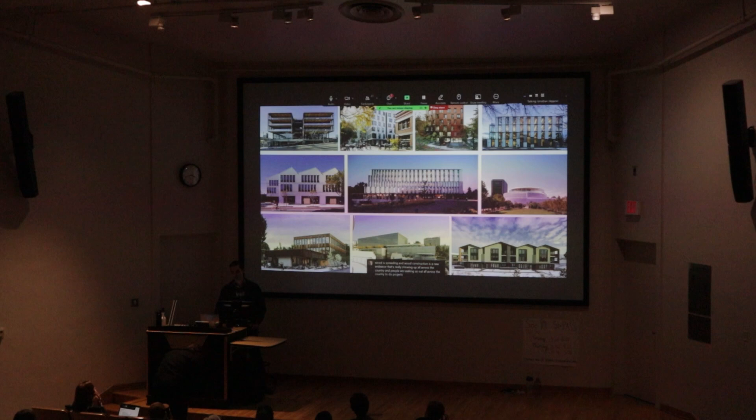Every couple months I update this map, and what's interesting for me is that as an Oregonian focused really on wood construction, all of a sudden wood is spreading and wood construction is a new endeavor that's really showing up all across the country, and people are seeking us out all across the country to do projects, specifically in mass timber.

So what I wanted to talk about a little bit, aside from just giving you a quick sample, these are some of the buildings that we've done that are complete this year, and I'll go into a few of these maybe at the end of the discussion. And these are a group that we have that are all in design right now and in permitting.

So our office probably has 30 people, and right now we're completely overwhelmed with the exciting work that we're doing. But I'm going to share a little bit of the research with you, and then share a little bit of how that research ends up folding back into our projects.

But before that, I wanted to talk a little bit about the forest, because I was joking with other people earlier that I was raised by trees, and the more I would say that, it was kind of a tongue-in-cheek thing, like, ha ha ha. And then the more I started thinking about it in little quiet moments on an airplane or in a car

or whatever, I was like, actually, really, everything that I'm involved with somehow ties back to this initial memory or experience or something about the forest, and it made me realize how intricately interwoven all of our experiences are with products that are made from wood and just the forest itself.

So I grew up really interested in drawing and sketching, and was fascinated by this book, D.C. Beard, where, I think this is potentially the founder of the Boy Scouts. There were all these little sketches and different diagrams about how you could put together buildings.

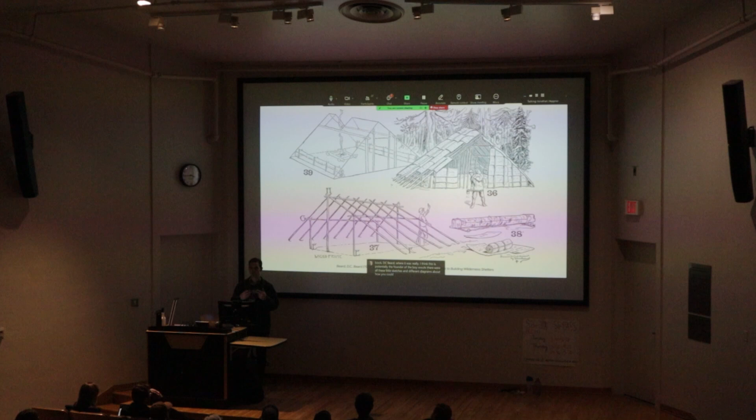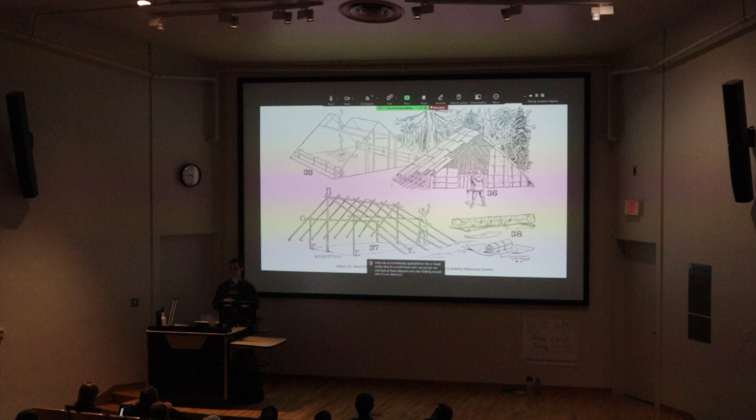And for me, what was so immediately applicable for this is I lived pretty close to a small forest, and I could just go out and look at these diagrams and start fiddling around with it in an afternoon, steal my dad's saw or whatever, and end up being able to build little structures, and it created this interest in the forest.

As I got older, I found that I could go to this really interesting camp in the Siuslaw National Forest outside of the Oregon coast. And I wasn't around when this building was built, but what was unique about it is that the U.S. Forest Service provided a land lease so that campers in this camp could grow up. And so every summer I would go out to the forest and spend time in the woods, just hanging out.

And I think this, to me, brings something full circle, which is this idea about community and the idea of being out in a place with people or just in a room with people, and the ability to share ideas and how that will then translate back into our work. So that theme will probably come back around as I'm talking about our projects.

So before we talk about mass timber, I wanted to talk a little bit about the way that timber was used historically, I guess, in the early 1900s for construction. I find it fascinating that somebody walked into the woods at some point and there was a tree that was this scale, and they imagined cutting it down.

There was this immense abundance of resources in the West, and that abundance led to a lot of really beautiful buildings and this advancement of hand technology and construction technology that I guess you probably wouldn't call technology in the 1900s, but this idea that you could build structures that would last out of this material that was just right outside your door.

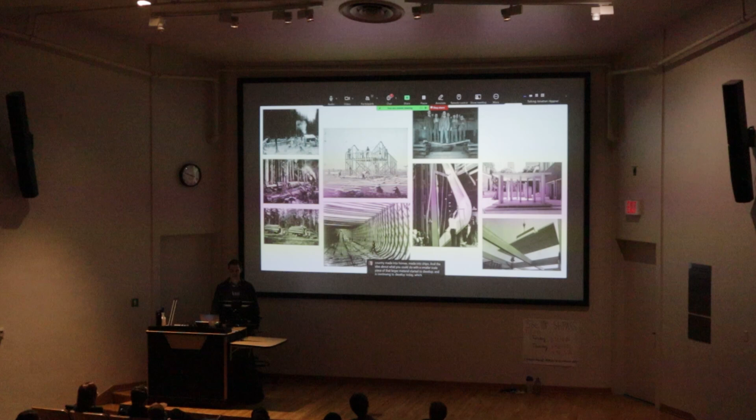So as technology and this availability of lumber was more readily known, there was a lot of transportation. The railroad systems were completed to connect to the west, and immediately you started seeing that it was cost prohibitive to haul really large things, and so you'd start to see smaller and smaller increments of that large thing shipped around the country, made into homes, made into ships, and the idea about what you could do with a smaller scale piece of that larger material started to develop, and is continuing to develop today, which is now the primary focus of what I spend the vast majority of my time working on.

I think the other thing is that, speaking of the abundance, this is an image from the 1930s in Idaho, where logs would float down the river, and I don't know if any of us have seen this in our lifetimes at this point, unless it's maybe in Canada somewhere. But this no longer occurs, and there was so much forestry happening and so much of the material coming out of the forest, there wasn't maybe a lot of consideration about how long it would last or what the implications of its use were.

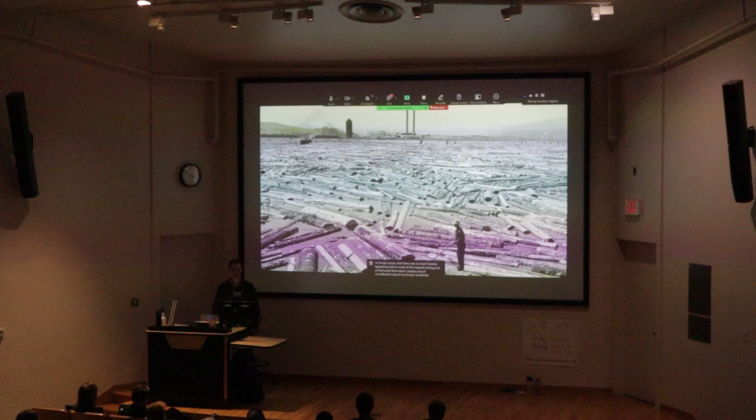And today we find ourselves in a slightly different scenario where there is an abundance of forest still, but there's also a lot of environmental issues that come from extraction of the wood from the forest that cause me to think about my use of that material. There's also a lot of construction emissions, not from wood specifically, but just from concrete. And I've been startled to always look annually at how much global concrete has been used this year, and what the use of that material implies for our world. Also, with forest fires, the amount of carbon that just a fire of a single forest can release.

I think what's interesting about this discussion around wood is that as an architect and a research architect, I find it really fascinating. Is there some way that I can use or think about the material that has a positive impact that will help people either have an elevated experience or just that there's some meaningful value in the work that I'm doing that improves people's lives?

So I don't know if this is widely known. I feel like I see this a lot, but our buildings and the construction industry produce over 30, up to 40% of the emissions annually. And so the work that we're doing in construction has a direct impact on air quality, water quality, animal habitat, etc. And so I continue to think, well, what does the relationship that I have with the forest mean, and what can I start to do in my practice that will have a more positive impact on that?

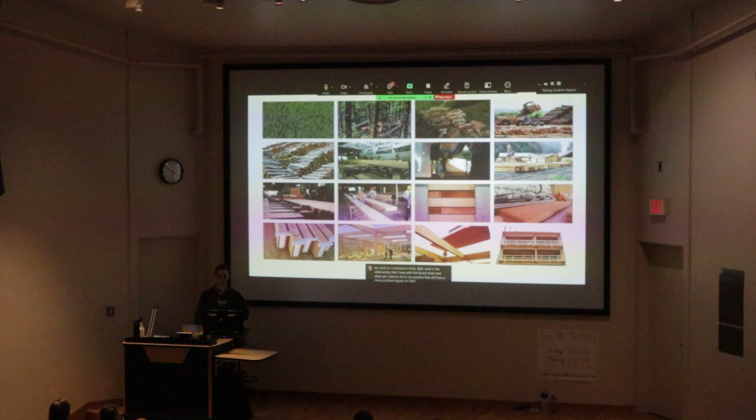So in about 2017, we started looking at this idea of forest to frame with some of our projects, and really started doing something that for me was unique in my practice, which was looking upstream of where I was designing to start making relationships and learning more about who was cutting down the trees, who was actually fabricating the trees, what were their concerns, what were their interests, and at each step of that process, I started to realize that I was a part of a much larger chain, and that my typical purview as an architect was really that I would talk to somebody who had already produced a material, work with somebody that wanted to build something with that material, and conceive of a design with a team of people to take that product and build something.

And the discussions that we were having made us realize that we needed to expand that discussion and interaction with the people that were actually milling the material, cutting down the logs, growing the trees in the forest, so that we could understand a little bit more about the material that we were working with. So that led us into our work with mass timber, and I won't go deeply into this because I'm sure that most of you know and understand what mass timber is, but at a molecular level or a cellular level, wood is an incredibly unique technology, I'll call it.

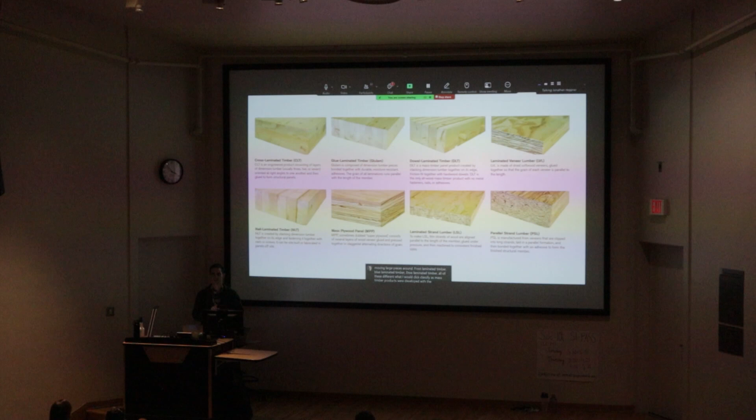It has amazing compressive force, and it sucks up water, and it also sucks up nutrients, and it captures carbon, and it has all these amazing things that it's doing. And because of its scarcity, I guess you could say, or the cost of moving large pieces around, cross-laminated timber, glue-laminated timber, dowel-laminated timber, all of these different, what I would classify as mass timber products, were developed with the use of adhesive to start putting together smaller pieces of wood into structural materials.

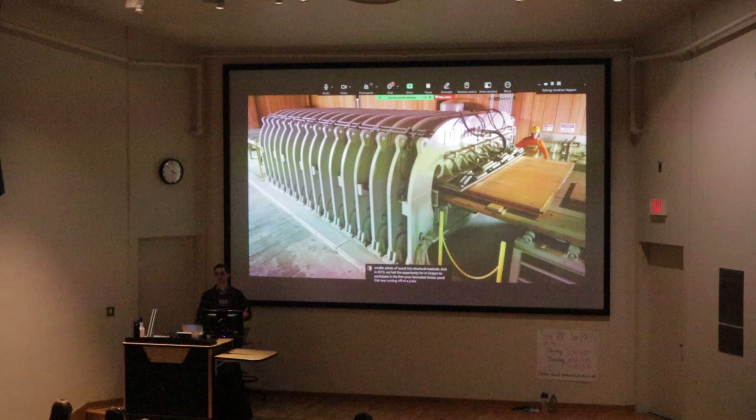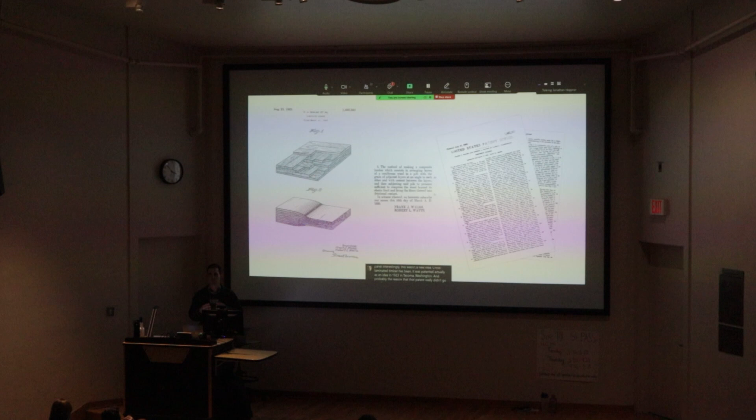And in 2015, we had the opportunity in Oregon to participate in the first cross-laminated timber panel that was coming off of a press and conceive of a building that used this panel. Interestingly, this wasn't a new idea. Cross-laminated timber was patented actually as an idea in 1923 in Tacoma, Washington. And probably the reason that patent really didn't go very far in 1923 is because there were plenty of really large trees that people could build with.

So moving to the current day, the benefits that we can see is that it has an incredible strength to weight ratio, it's fire resistant, it's fast to construct with, it's clean comparatively to doing lots of dirty concrete work. The construction is fast and quiet, and it also has all of this ability to sequester carbon, and depending on how you think about where it's coming from, positively impact issues around wildfire, etc.

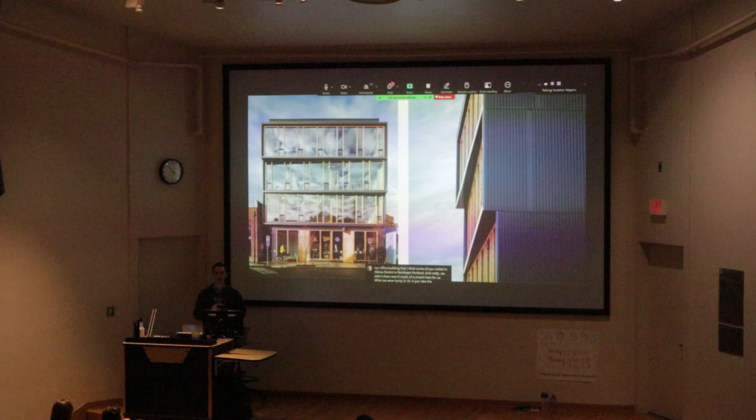So in 2014, we started the design on what's now our office building that I think some of you visited in Albina district in Northeast Portland. And really, there wasn't much of a stretch here for us. What we were trying to do is just take the material and knowing that other people were going to be building with it, like just don't mess it up. Just do a good building and keep it straightforward.

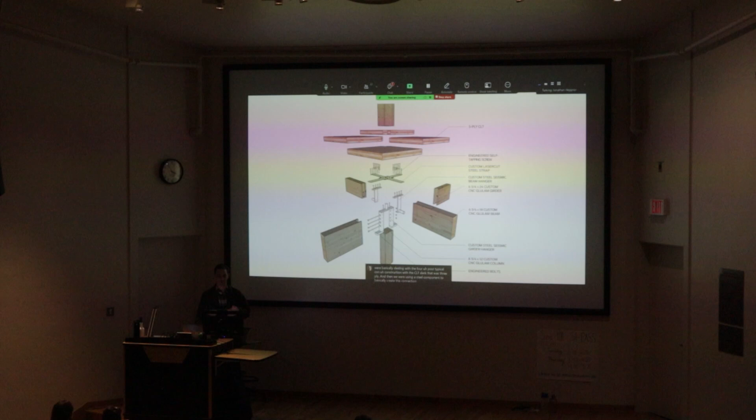And so the system that we conceived of seems really extremely complicated now in retrospect looking at it, but we were basically dealing with a 4-post typical construction with a CLT deck that was 3-ply, and then we were using a steel component to basically create this connection. And most of the building details used this one detail, so we tried to just come up with a simple detail that we could repeat over and over again.

And the way that ended up shaking out after we produced the construction documents and went through the shop drawing process is that we had to work with somebody that we hadn't worked with before, which is the fabricator who is going to be actually cutting the design that we had put into the SketchUp model and the Rhino model that we were working with. And as we started to work with it, we realized all of a sudden that most of the details that we had drawn didn't really work that well.

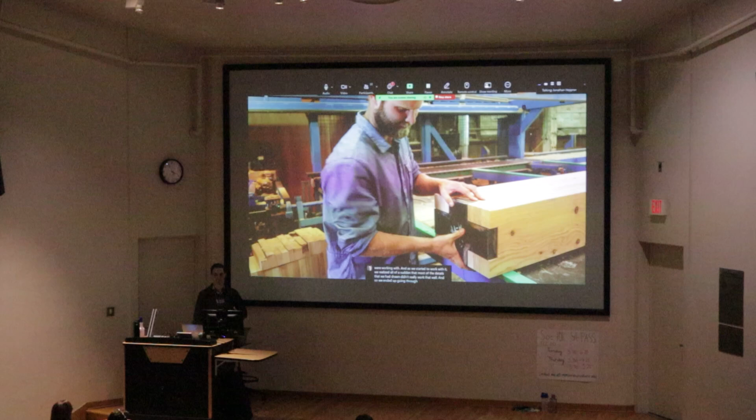And so we ended up going through this really exciting design build kind of process, I guess you could call it, where we were doing mock-ups to test the material. And in this case, we realized, for instance, that the CNC fabrication was so precise that we had to account for the welds in the steel. And there would have been no way to know that unless we had actually put the two things together and built it in place to test it.

And the building turned out really excitingly. It turned out great. Construction was very quick, so we could bring the materials up. The CLT panels would come up from outside of Eugene in about 3 hours, and they would arrive around 9 in the morning, and then by lunch, a team of like 3 or 4 people would put down 4,000 square feet of floor deck and then get the walls and the columns tilted up and prep for the next floor, which would take another week or so to build. And the level of resolution of the material was absolutely beautiful.

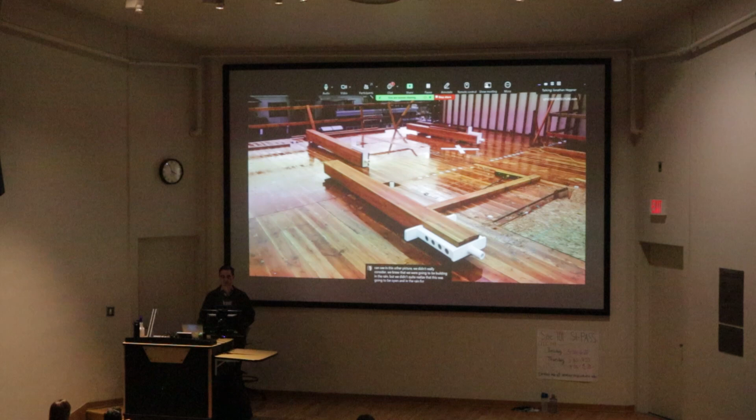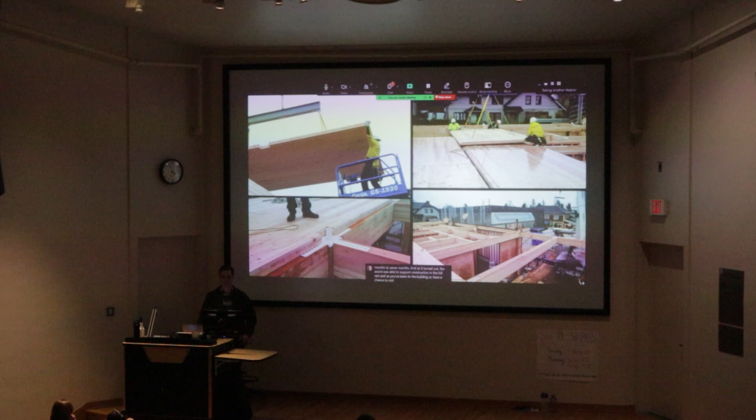And as you can see in this other picture, we knew that we were going to be building in the rain, but we didn't quite realize that this was going to be open and in the rain for probably 6 months to 7 months. And as it turned out, the wood was able to support construction in the full rain, and if you've been to the building or have a chance to visit, you could never tell that it was exposed to that during that time.

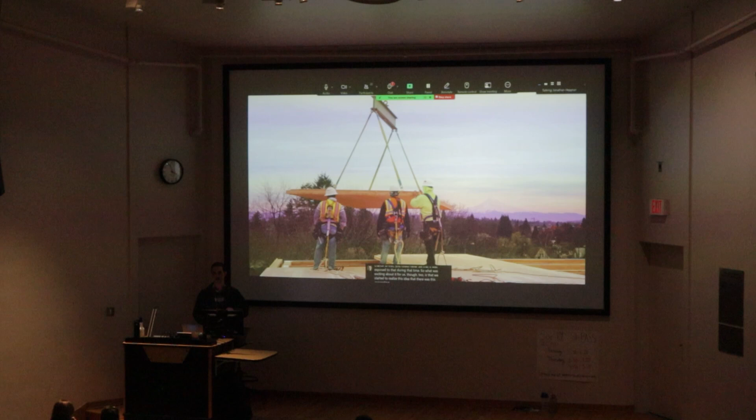So what was exciting about it for us, though, too, is that we started to realize this idea that there was this connection, and especially when you went up on the top floor on the job site, that you realized, like, oh, the building that I'm standing on right now is produced from the forest that I can see in the distance. And there was a direct one-to-one correlation that was very present and impactful.

So around the same time, there was a competition for a tall wood building that was mentioned in 2017. And there was a lot of emphasis on the use of mass timber. It was a national competition. We won the competition with SHoP Architects also winning a version of it in New York. In Portland, Lever was going to design a 12-story building that was for affordable housing and a B Corps office. And then in New York, they were going to design luxury condos, high-rise,

which gives you an indication of the difference; I found that interesting. But for the competition, we developed this idea that for this material to be successful, we would need to be thinking about the forests that the materials came from and how that went to the mill, and this idea of what we call the virtuous cycle, where rural economies and urban economies were joined, and that we were doing a lot of things all at once just through the use of this one material.

And interestingly now, as I look, and this was now about 7 years ago, when I start to look at the work that we're doing, all of these little jobs, forestry jobs, the manufacturing jobs, new projects, code acceptance, transfer of technology, we were just making this up at the time, and what's exciting for me is that all of the things that we were talking about in this diagram and hopefully seeing the opportunities for have started to take shape, and now in 2024 are happening.

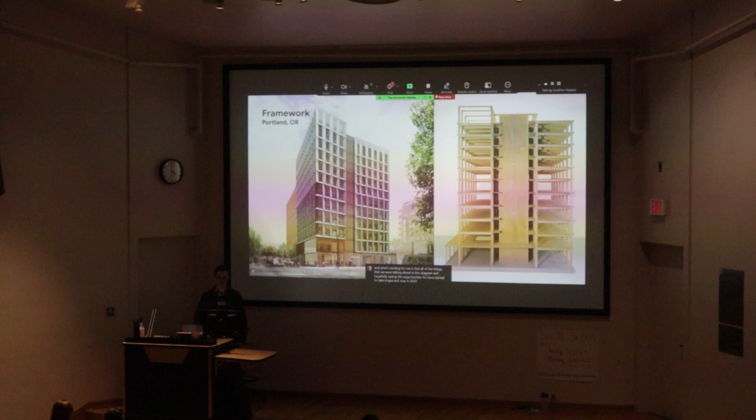The unique thing about this building, Portland is in a high seismic area, and so we had to go through a lot of testing, and the grants that we got for the project were really about the testing of the material. The jurisdictions that were approving it, which in this case was the state of Oregon, didn't know that it was fire resistant. There was no method or model necessarily, so we had to show through testing that the building was fire resistant. Structurally, we were in a high seismic zone, and there was not really an idea whether the building structurally at that scale would work, so we had to do structural testing.

And then there were no current standards for mass timber and floor assemblies and acoustics, so a part of the building code is that we had to do acoustic testing so that we could indicate that when your neighbor's upstairs going nuts, the code level floor would make sure that you were comfortable in the unit below.

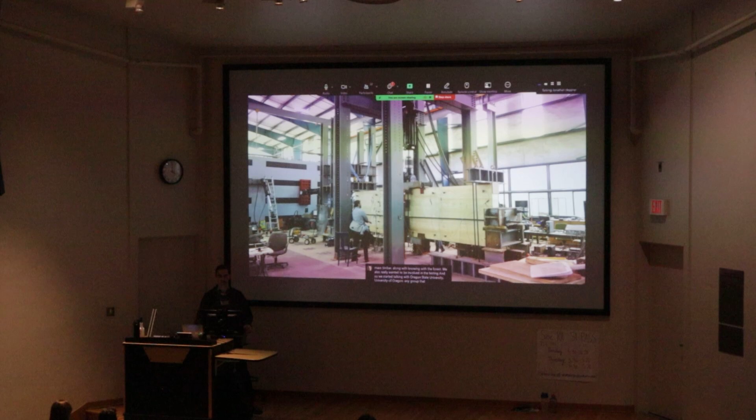And I think this was really the point in the firm where there was a small fork, and we realized that if we were going to be serious about building with mass timber, along with knowing the forest, we also really wanted to be involved in the testing. And so we started talking with Oregon State University, University of Oregon, any group that was doing mass timber testing, and would work with them along with our practice in architecture to start trying to get things approved and get money from grants so that we could spend some of our work testing products to use in buildings.

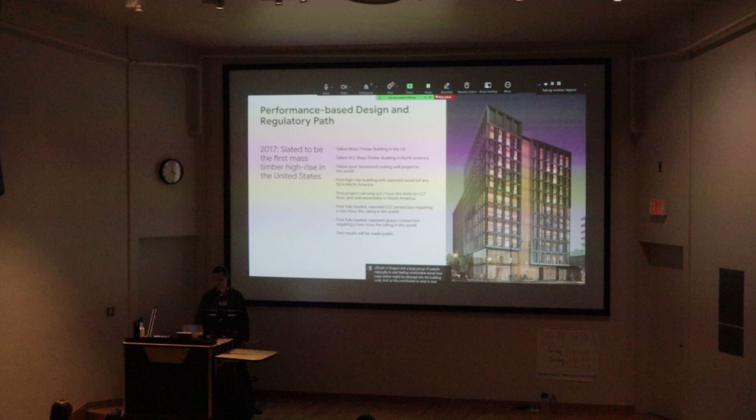In the meantime, the Framework project was able to get through permit, as the first permitted mass timber high-rise, and that permit allowed the building code officials in Oregon and a large group of people nationally to start feeling comfortable about how mass timber might be adopted into the building code. And so this contributed to what is now codified in Oregon and other states around the country.

So we started out, we always have the fir tree up for reference. We started out with the small, what we'll call a type 5, which is an all-wood small building, and then we did Framework, and Framework didn't get built. And then what was interesting is that in Milwaukee, Wisconsin, there was an interest, a piece of land, and a company was able to put together a team.

Some of the builders were from Portland, and they had knowledge of the Framework project, and we talked with them, and some of the engineers, Thornton Tomasetti, were working on the project, and we started talking and sharing some information, and they used a little bit of the research that we had done to talk with the building officials in Milwaukee, and the Ascent Tower was completed, I think, 2 or 3 years ago now, at much higher than we had anticipated for Framework, at 25 stories.

And I think they're now working on a building that's mass timber that's maybe 29 to 30. And Wisconsin's apparently really cool with timber, so. And then also, at the same time, we started working on a project called Sandy Pine here, well, I say here in Portland. I'm not in Portland, I'm in Idaho, but in the US.

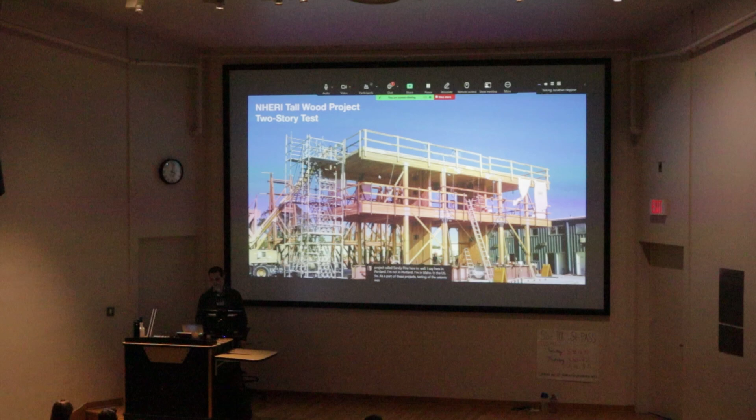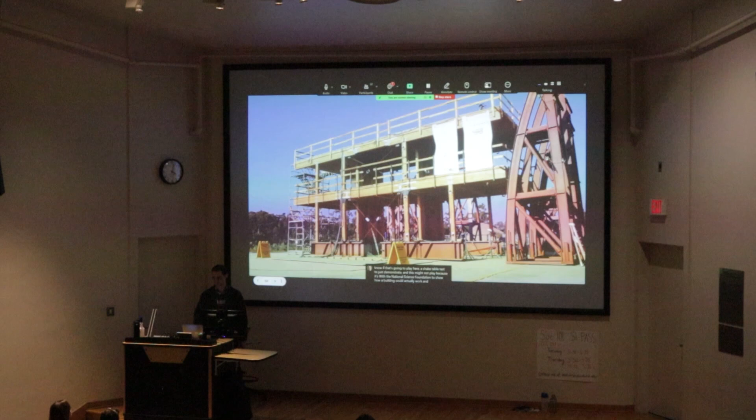So, as a part of these projects, testing of the seismic was a really important piece. And so we, in partnership with OSU, started working on a shake table test so the building could actually experience seismic forces and not have damage. This particular test led to the utilization and interest by the National Science Foundation for a much larger version of the same thing, because they thought, well, it's great that it works at 2 stories, but will it actually work at a much higher?

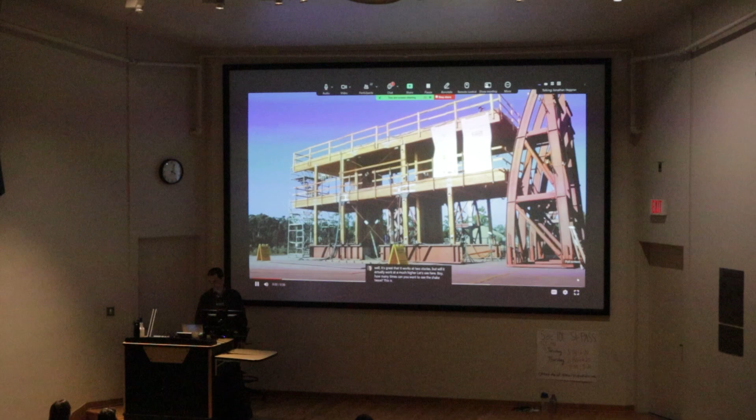Boy, how many times can you want to see the shake table video? This is the danger of including videos into your presentations. I'm going to have to click out of here. Well, just go to the next slide. Video keeps on playing. Oh boy, kick you out all the way. Nice to know. So in 2017, along with Framework, we started working on, oh boy. This is why I was debating, should I do a video? No, maybe. Yeah. Just pick a spot here. I'll go back over to my backup deck, the non-video deck.

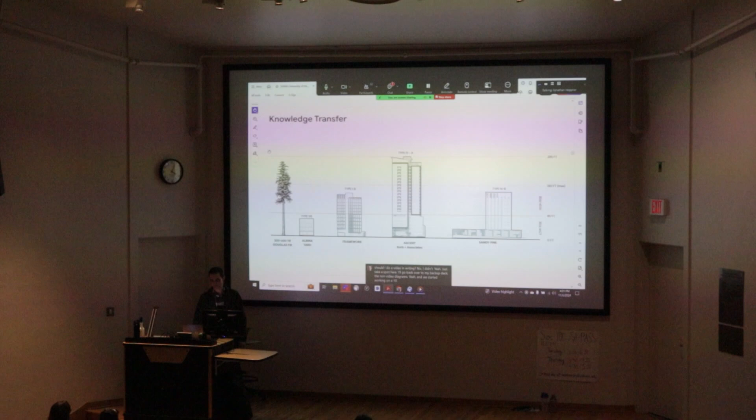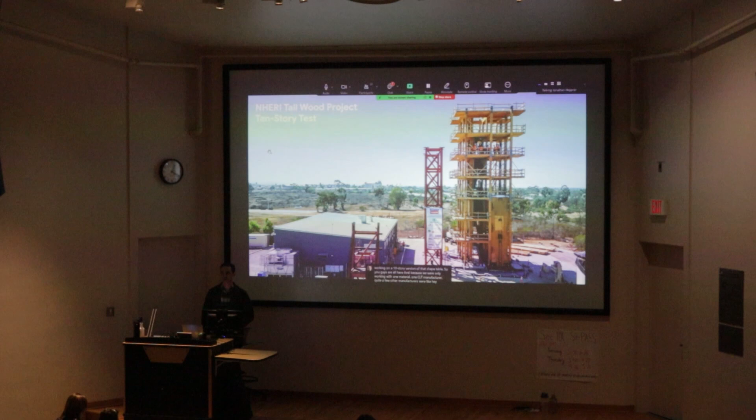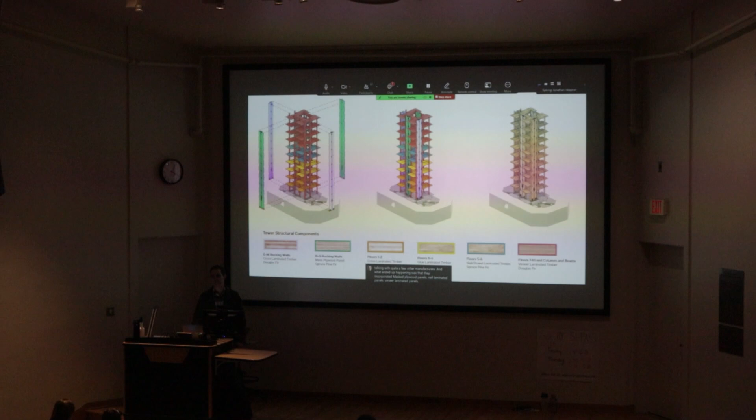Yeah, and we started working on a 10-story version of that shake table. And because we were only working with one material, one CLT manufacturer, quite a few other manufacturers were like, hey, if you're only going to get it tested for this one material, then that's the only product that's going to be used in our buildings. So the principal researchers started talking with quite a few other manufacturers, and they incorporated mass plywood panels, nail laminated panels, veneer laminated panels, glue laminated. All the laminations and acronyms started to get out of control.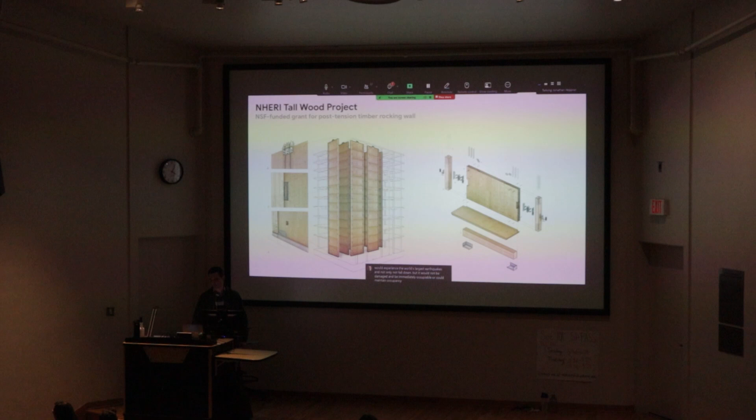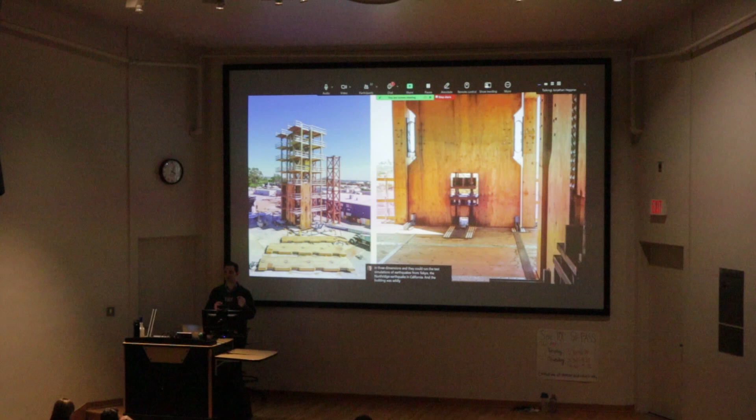But it did successfully result in a 12-story project, and the goal was to indicate that you could build a building that would experience the world's largest earthquakes and not only not fall down, but not be damaged and maintain occupancy after the earthquake. The testing table would work in 3 dimensions, and they could run simulations of earthquakes from Tokyo, the Northridge earthquake in California, and the building was wildly successful. There was one piece of damage, a slight error that we had made in the detailing of a non-structural component.

Oh, I unshared again. This is good. Good stuff. Love technology. It's our friend. Thank you for bearing with us in this wild ride of somebody sharing a screen. Wait for it. All right.

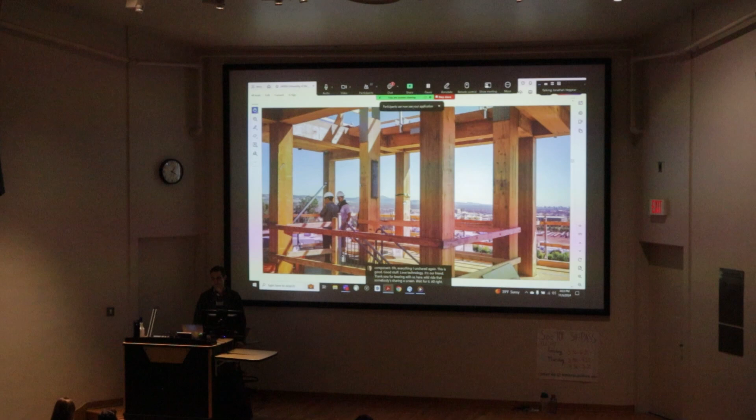So the test was wildly successful, and the error in drywall was attributed to a miscalculation, and the building successfully weathered, I think, over 1,000 simulated earthquakes with no damage. The reason it worked was because we had communicated as a group, and granted this took 7 years, so there was a lot of communication. It was people from the forest industry, lots of different universities, the US Forest Service, and quite a few different engineers. It really reminded me that it takes a lot of collaboration and community to come up with solutions and not necessarily just protect your creative IP.

So somebody during the process for the shake table reached out to us in Oregon, and they said, we're going to design some mass plywood panels. I was going to show you the video of this, but I may not do that now because I don't want to have you weather another thing. But there was a John Yeon installation happening at the Portland Art Museum, and John Yeon was a well-known architect that worked with plywood quite some time ago, I think back in the 50s, maybe even a little bit earlier.

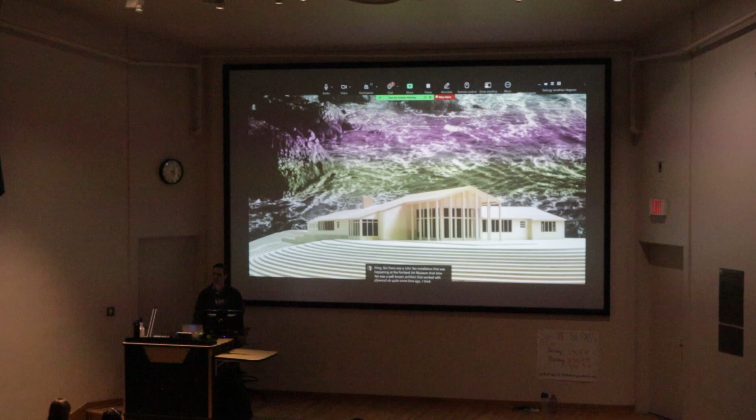And so as a part of that installation, we worked with this manufacturer to take a test of their panel, which had not been put out on the market yet, and do a little demonstration pavilion with it for the Portland Art Museum. And the interesting part of these panels is that they can be fabricated up to 10 feet or 11 feet wide and 48 feet long.

And I won't go into my own internal thought process about the differences between CLT and MPP, but there is one interesting thing. So CLT is made from stacking boards on top of each other, layer over layer. And the boards are basically cut. So if you imagine that a tree is accumulated over time, it's just layers on layers on layers. So every year the tree gets larger and larger. A beam is cutting through that, or small dimensional lumber, you're just slicing through that.

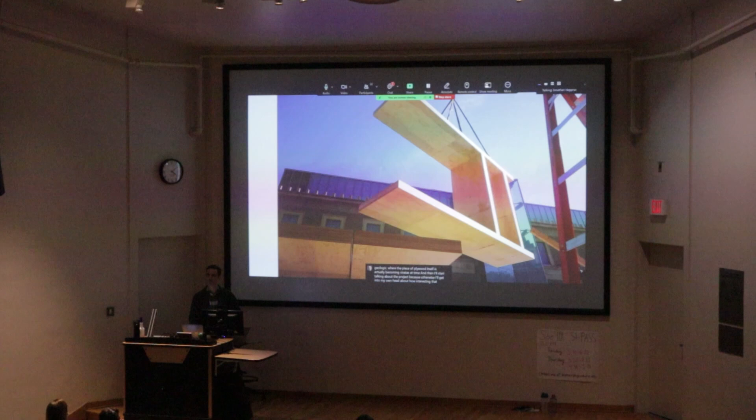And the interesting thing for me about plywood is that you're literally unraveling time when you run the log through the machine that's creating the veneers. And so what you start to see is, in a weird way, geologic, where the piece of plywood itself is actually becoming strata of time. And then I'll start talking about the project, because otherwise I'll get into my own head about how interesting that is, and where did that little piece of wood come from, and what was the weather like that year.

So anyway, we used this as a demonstration for the product, and they left it out in the rain to see what would happen. And then they were like, that's really cool, so let's see how much cutting can you do with it, and we might want to get interested in that. So we went through and did a series of pavilions for the Mass Timber Conference over 3 years, where we would work with the manufacturer to basically test out different ideas and start to create these little test buildings, we called them, that would become a center focus at the Mass Timber Conference.

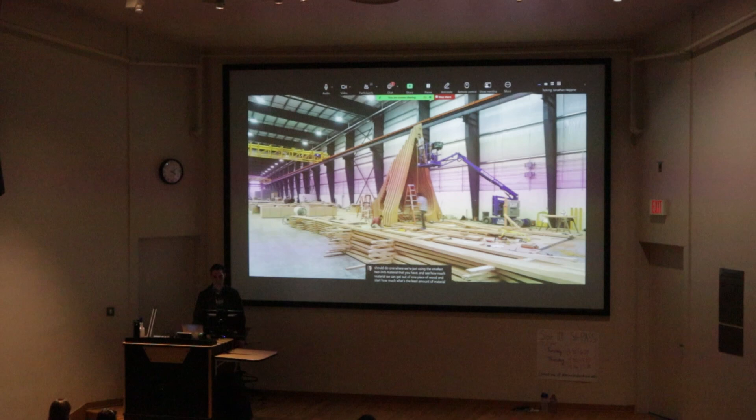And the final year, we're like, well, we should do one where we're just using the smallest 2-inch material that you have and see how much material we can get out of one piece of wood, and what's the least amount of material that we can use to create a form. And it was just this really amazing opportunity to mess around a little bit with digital technology and fabrication. And then the idea of nesting and learning how to nest things and expand them, that has been really helpful.

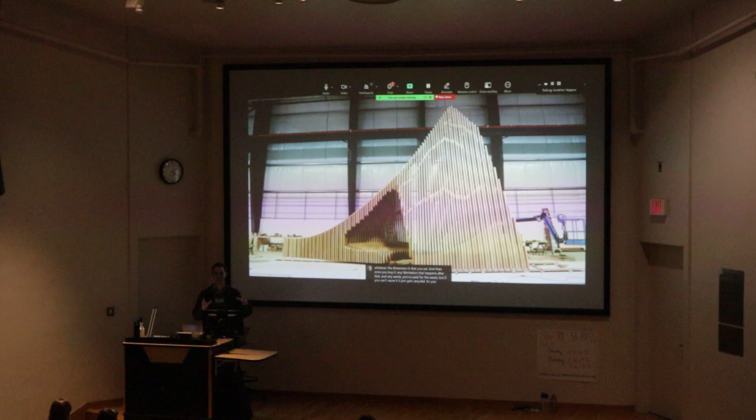Because ultimately what it comes down to is that it costs money to buy that piece of wood. And as a designer, what you have to think about is that you're buying a whole piece of wood. You have to buy the whole 10 by 48 thing, or whatever the dimension is that you set. And then once you buy it, any fabrication that happens after that, and any waste, you paid for the waste, but if you can't reuse it, it just gets recycled. So you really have to think about, how can I use the most out of that material? And it's led to this really interesting architecture of optimization and efficiency that we're constantly talking about.

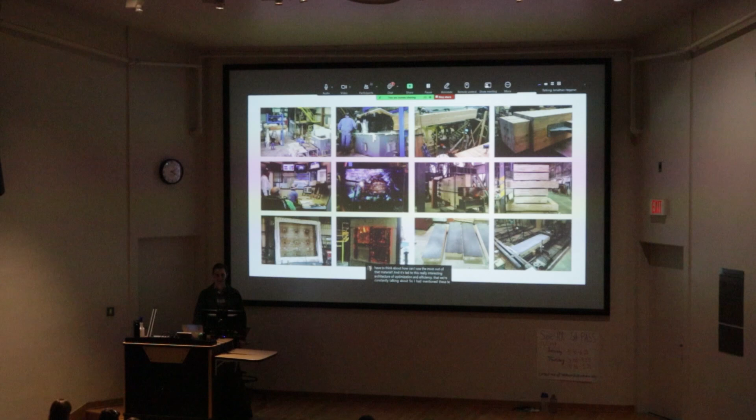So I had mentioned these tests that we were doing. We've gotten really involved in testing, and I never expected this to happen, but because of our relationship with some of the different universities, OSU specifically, who's interested in doing a fire testing lab, we started work on a facility that's just for testing fire. And we did not make it out of mass timber, because that would be just a little too risky. But it is directly adjacent to the Wood Products Lab, which was a building designed by Michael Green for OSU. And we're the small little building over here to the right. So good things are going to come out of this small little facility.

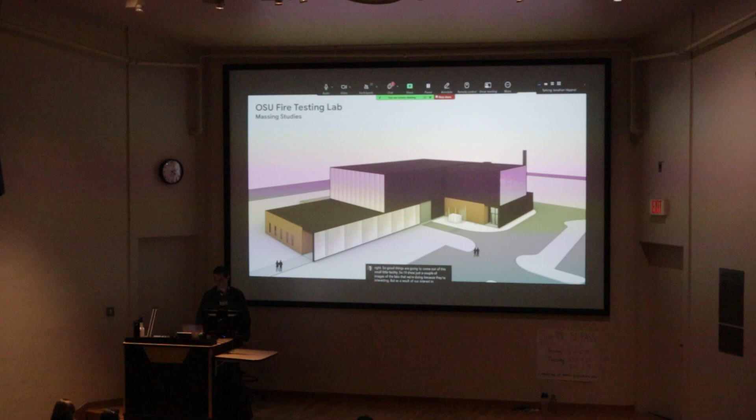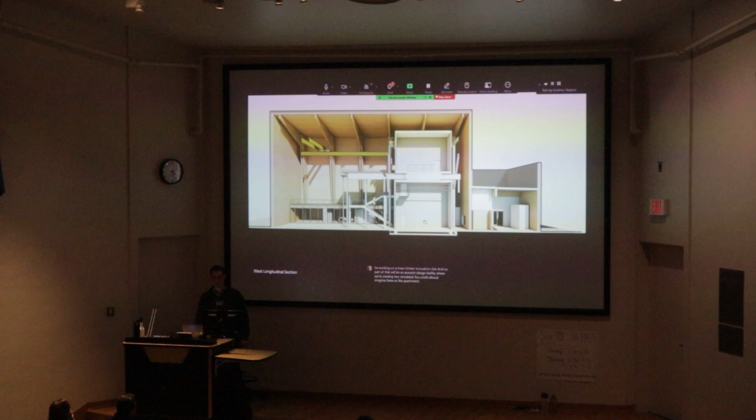So I'll show just a couple images of the labs that we're doing because they're interesting. As a result of our interest in all these other things, we started really focusing on how to fire test and structural test and acoustic test. The other lab that was mentioned is U of O. There's a Terminal 2 site at the Port of Portland where they're going to be working on a mass timber innovation hub. And part of that will be an acoustic design facility where we're creating 2 simulated, you could almost imagine these as apartments above and below in this little chamber, and testing it. And that building we can do out of mass timber.

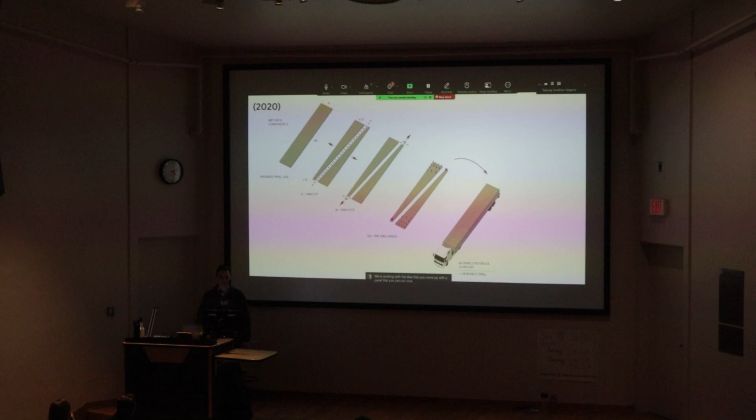Because we're working with the idea that you come up with a panel that you can cut once and then put on a truck in the same dimension and then tilt the building up. And it's kind of like the Butler building version of

utilizing wood. I think that as we're doing all this work, I'm always looking at, and I Google this periodically, how many mills have closed this year. And in this last year, I think there's been, in Oregon and Idaho, probably 8 mills. And I always find it interesting that the reasons that they're closing is that it's unsustainable for operation.

Drug-free workforce is hard to come by, housing shortages, and in a strange way, a lot of the things that are the reasons that the mills are closing are the reasons that we're trying to do the projects that we're doing.

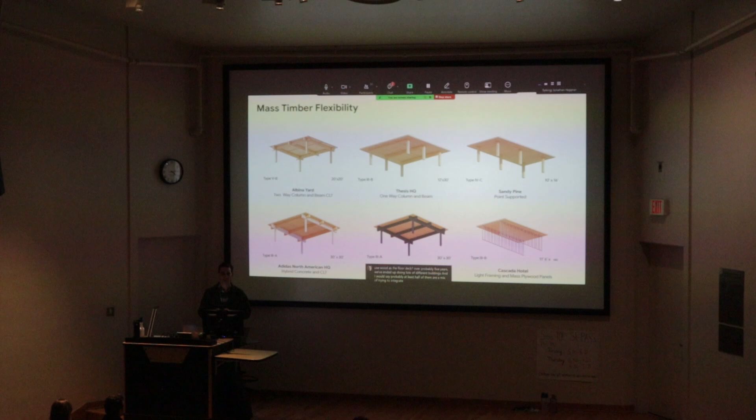And over probably 5 years, we've ended up doing lots of different buildings, and I would say at least half of them are a mix of trying to integrate mass timber into the building in a way that is appropriate, and it starts to make you realize, at least for myself, that the timber is not just a solution, but it's just another one of the building materials that you're using. And you can build all these interesting things out of it, but you also are mixing it with steel, concrete,

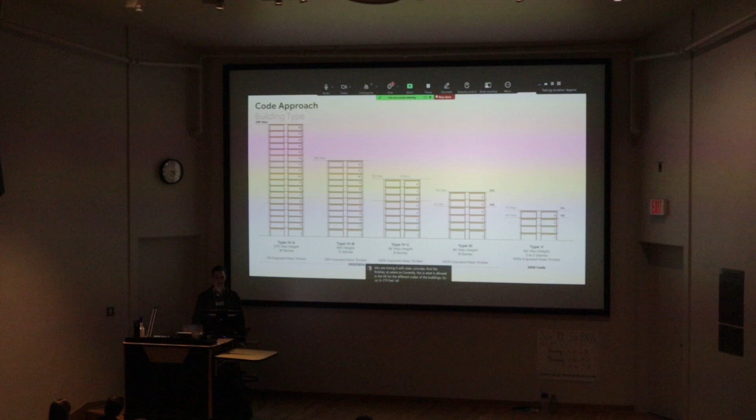and the finishes, etc. So currently this is what is allowed in the US for the different scales of the buildings. So up to 270 feet tall, and you could probably go taller than that if you had a fire engineer and somebody that was interested. But we had to come up with a methodology for how we could figure out where the mass timber would fit into the project. And it really had to do with, do we need a flexible floor plate or not? Do we want a parking podium? Does parking play into it or not?

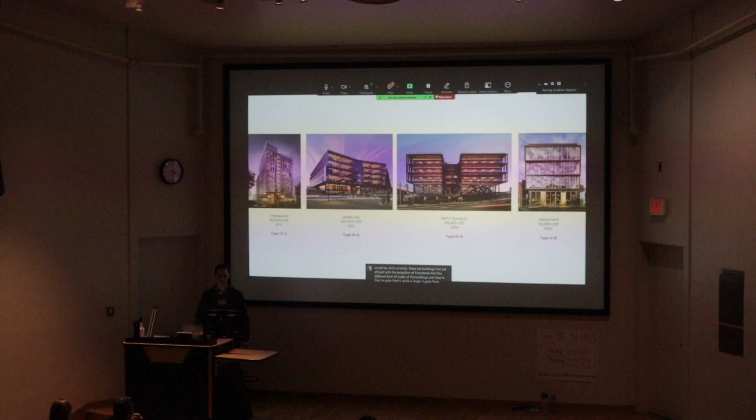And so we built a little spreadsheet for ourselves so that we could track through, based on the size of the building and the different programmatic pieces, what the best system would be. And currently, these are buildings that are all, with the exception of Framework, at different scales, and there's quite a range. It goes from 15,000 up to, the Adidas project was like 400,000 square feet.

So going into how we're using this and thinking about this, I'll share 3 projects, and I'll try to be brief here. I haven't really been paying attention at times, so I apologize if I'm just droning on about wood. But we wanted to do a renovation of this building and use CLT as a load-bearing window system. And we had the opportunity with the Nature Conservancy, who had their own forests, to really come up with a project that would take materials from different forests and integrate them into the building in different ways.

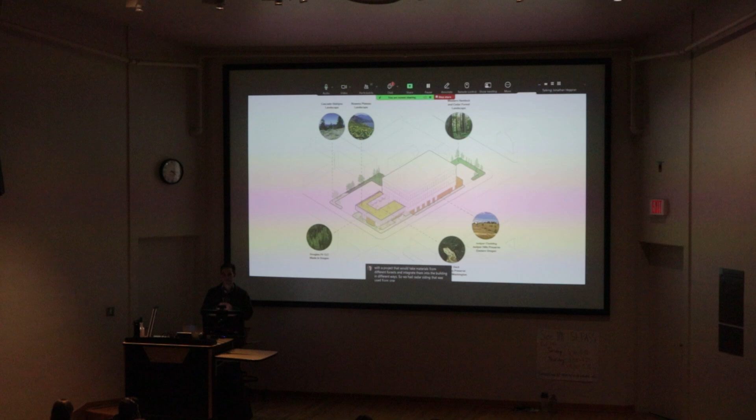So we had cedar siding that was used from one part of the state, juniper cladding that was used that was for restoring water and has started to show up a lot more in our work because it is invasive and removing it from the landscape really helps. In this case, the juniper, by using it for the project, returned over 700,000 gallons of water a year and brought back a spring that hadn't been on the area that we had done the harvesting since like the 1930s.

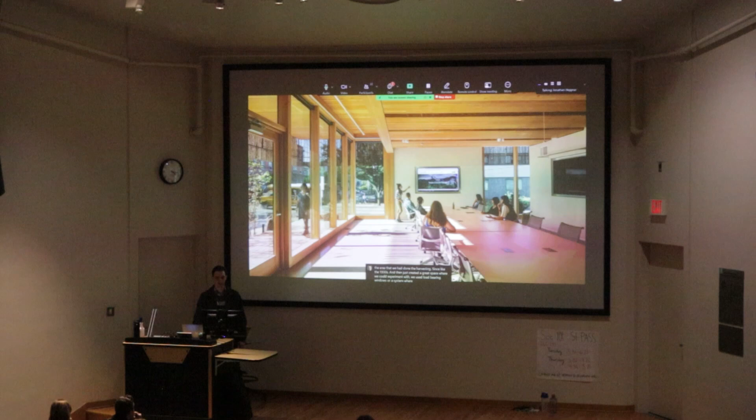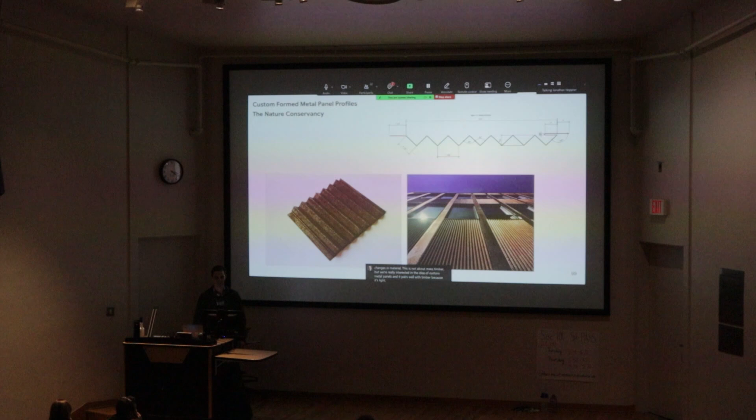And then just created a great space where we could experiment with load-bearing windows, or a system where the actual windows were load-bearing. And just thinking about how we could also use different materials to create depth and changes in material. This is not about mass timber, but we were really interested in the idea of custom metal panels, and it pairs well with timber because it's light. So as a facade system, it's really helpful not to just load up brick or other heavy cladding systems onto the building.

So I don't know if you took road trips or ever played this game, but I have a sister and we took long road trips and we would always play Connect the Dots. And I think this project was a point-supported tower, and I feel like this brought out the puzzler in me, where it was like an obsession with connecting the dots, metaphorically and literally.

So this is the Sandy Pine project. This is in for permit right now in Portland. It's utilizing the MPP deck for the floor system. And the idea with this project is that to make the timber efficient, or the overall cost of the project efficient, we wanted to remove the beams from the project. And that gave us a variety of benefits that I'll get into, which have to do with higher floor-to-floors within the same height.

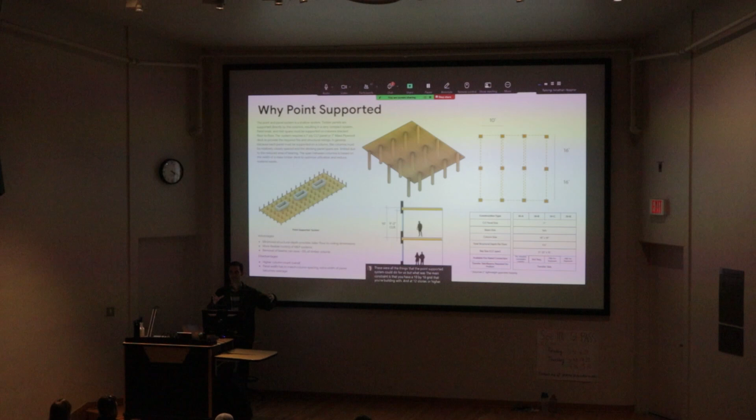Also, I don't expect you to read all this because I just pulled this out of one of our decks, but these were all the things that the point-supported system could do for us. But the main constraint is that you have a 10 by 16 grid that you're building with. And at 12 stories or higher, the columns start to get really large. And so you're designing a 10 by 16 space with maybe a 9-foot ceiling, and you have to think, if you've got 30 units on a floor, how do you do that?

And that walkway, over time, became a connection point and a wagon road. And then that wagon road was the connection on the Oregon Trail that would come through Idaho and to points abroad. And in Portland, it turned into a boulevard. And then the site for this building was on that boulevard. And what was interesting to me is that the boulevard connected to the gorge and all of this amazing landscape upstream.

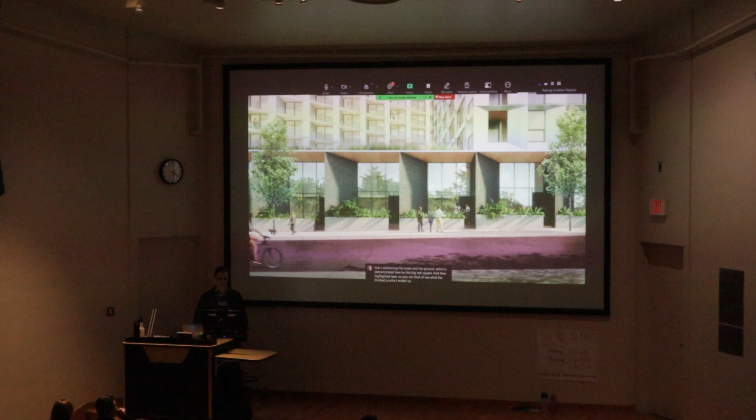And at a local level, we were connecting and cutting through the city grid. So it was this kind of unusual site where part of the site was nicked off by this trajectory of Sandy as it came through the site. So we came up with an idea that we're going to do a two-part building. The part that's addressing the street and the ground, which is demonstrated here by this big red square. And then highlighted here so you can kind of see what the finished product ended up at the street level, with some housing and some live workspaces. I won't get into the details just for time.

And then the upper part of it, which was the idea that we were going to create the shape of the building, which, mind you, we're still functioning within this connect the dots world, trying to ignore that for a second as we come up with the idea, that connects with the alignment of Sandy.

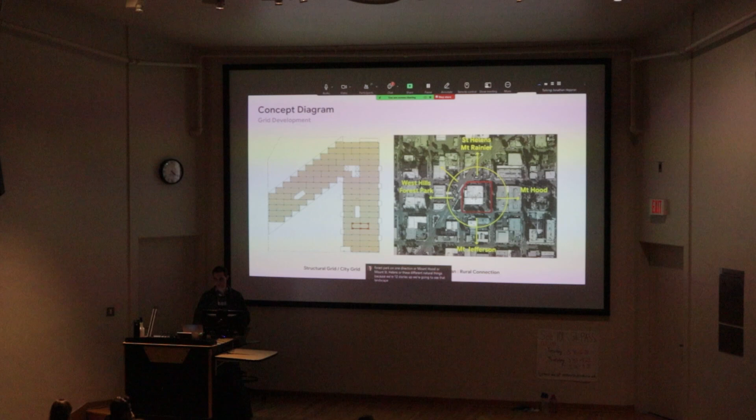And it also has these benefits where you start to look out of any individual unit, you're always seeing out to a natural feature in the landscape, whether it's Forest Park in one direction, or Mount Hood, or Mount St. Helens, or these different natural things. Because we're 12 stories up, we're going to see that landscape in the distance. So we were rooting and connecting the building at the base to the city grid and then to the views above.

And then we did the point-supported layout with that shape, and we did have to fuss around with it because of this kind of angle, but we came up with a fairly straightforward system that allowed us to put the core for the elevators right at the knuckle where those things all came together, and then we had, surprisingly, only 2 stair cores out at the ends to help with the structural stability. And really worked with this idea that we're basically creating a building where you're just among this forest of columns.

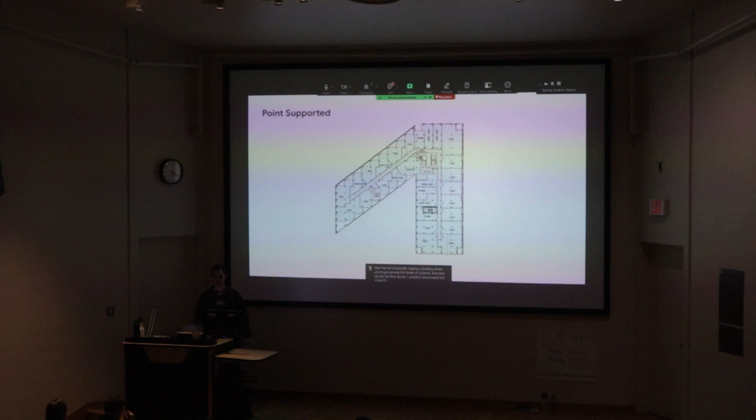And then we did the floor layout. I wouldn't recommend this shape for a floor layout in a point-supported tower, but it turned out pretty cool. It was just not super efficient to think through it. And we realized in the process as well, when we were going through with the contractors and measuring the volume of wood, that very small tweaks to the columns wouldn't really change the volume of wood that we were using, even though there were like some 300 or 400 columns per floor or something. It was this really large number.

But then if we would change the thickness of the deck by like 2 inches, it would have this massive impact on the volume of wood. And so we started to realize that most of the wood volume for this project was in the floor slabs, which was really important because we were trying to decide, and this was a strange trade-off that you get into with mass timber, where structurally it would be fine if we would have a 5-ply assembly,

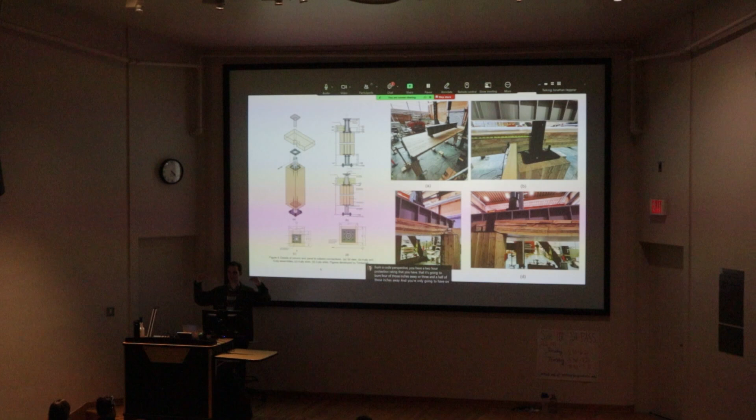but from a fire perspective, from a code perspective, you have a 2-hour protection rating that the floor has to meet, that it's going to burn 3.5 to 4 of those inches away, and you're only going to have one set of 2x8 boards going in one direction, and it's not enough, so you have to add another 2 layers based on the way the panels are built to get to a 7-layer panel. And that is a huge cost issue, as I was describing, with 60% of the floor.

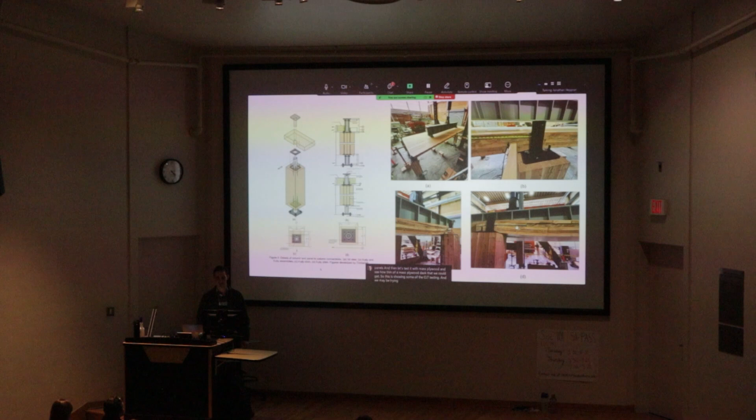So we went to the engineers at OSU and we worked with some folks that we know and said, let's test these panels. And then let's test it with mass plywood and see how thin of a mass plywood deck we could get. So this is showing some of the CLT testing, and we may be trying to get somebody to manufacture us a custom panel. They always love that when you ask that. Can you just change your entire setup for your whole manufacturing facility to take one lamella off of this panel?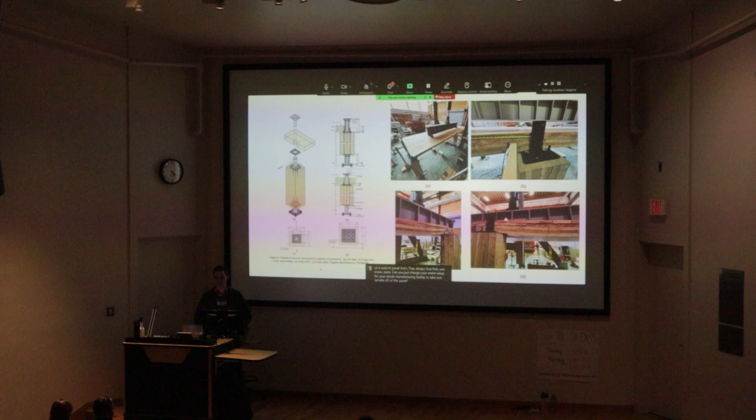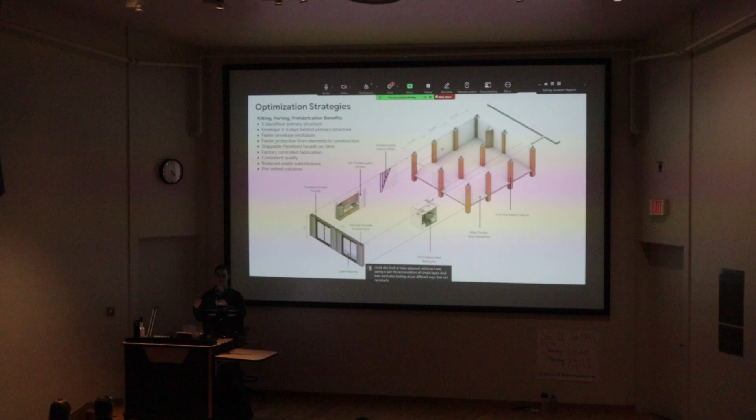Or we could also look at mass plywood, which, as I was saying, is just this accumulation of simple layers. And then we're also looking at different ways, not necessarily completely going the auto wall route, but thinking about the different pieces that we can bring in that are prefabricated.

And then there was the exercise of designing the units, and I feel like we kind of did it. There were columns where you would not feel like there was a column in your way, and you could see the scale of the actual space. And then there was a taller ceiling because we had gotten rid of the beams. This is a version that is a little outdated where there are 2 beams, because we were like, well, what if we just put in 2 beams to hold up a balcony? And the owner was like, just stay pure with the concept, so we took those out.

But I think from a housing standpoint, the volume or the height that you get, a beam at this scale would probably be at least 18 inches to 2 feet and would start to break up the rooms. So anyway, the free height is over 9 feet tall. I think in these it's a little 9.5.

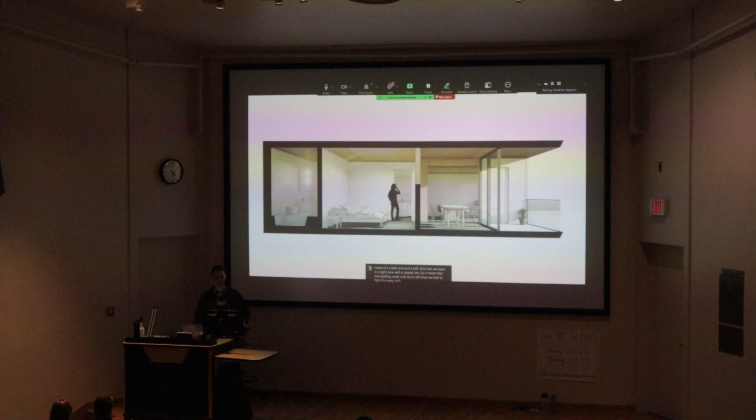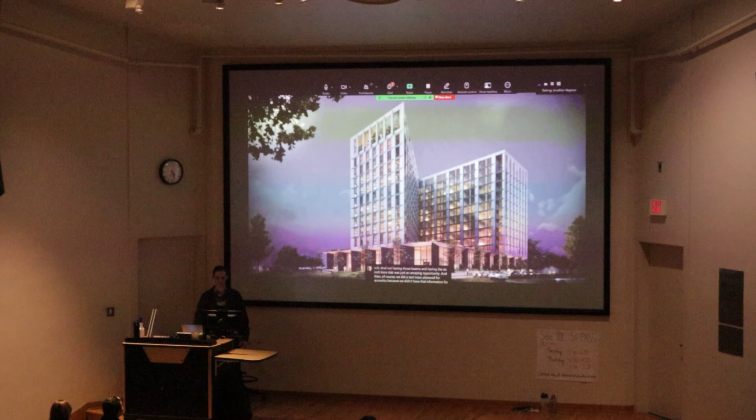And then we were in a tight zone with a slope site, so it meant that the building could only be so tall and we had to fight for every inch. And not having those beams and having the 6-inch floor slab was just an amazing opportunity. And then, of course, we had to test mass plywood for acoustics because we didn't have that information yet. So hopefully this project will start construction in the near future in Portland.

And then the last one, which I'll end on, is playing around. And this is kind of like the opposite end, I think, of a lot of the work that Lever's done, where this building is really for a hotel. And we didn't quite realize it in talking with the owner up front what his ambitions were. And it's been under construction now. When we started the project, it was going to be the first mass plywood building. There have since been lots of mass plywood buildings built.

But the reason that there's so much time that's been spent on it really doesn't have to do with the timber, but they're building a hotel in the Arts District that's just really fascinating. And it's connected to all these different things around Alberta Street, which is a really lively street in Portland. Hot places that you can go in the middle of the winter. I'm thinking of Marrakesh, and we're like, oh my God, this has nothing to do with Portland.

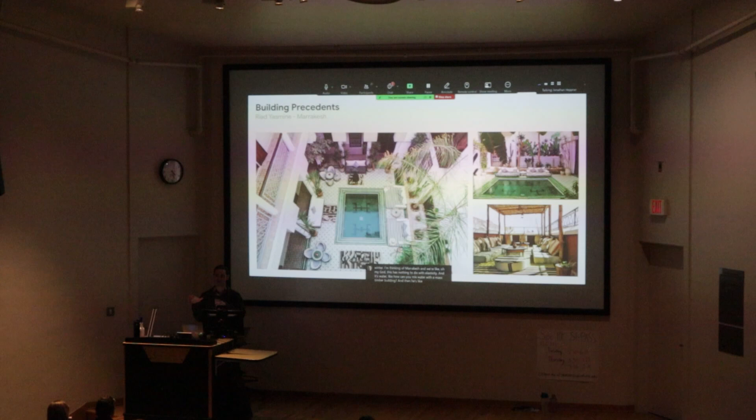And it's water, like how can you mix water with a mass timber building? And then he's like, well, it's just the one pool on the main level, but we can put the other 5 pools in the basement. So we're like, oh my gosh, this is getting exciting. But we did take the challenge seriously and looked at the different ideas about using balconies, which he wanted to make sure that every unit in the building had a balcony.

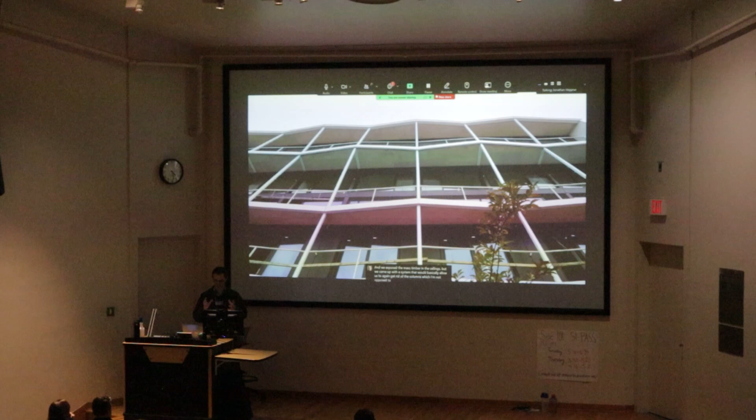And we exposed the mass timber in the ceilings, but we came up with a system that would basically allow us to, again, get rid of the columns, which I'm not opposed to columns, but we were trying to get quite a few units into a tight site. And so we came up with a system that we call the plate and panel system. We're using low carbon concrete on the first 2 floors for the areas where there's lots of water. And this is, I don't know if this reads very well on this scale.

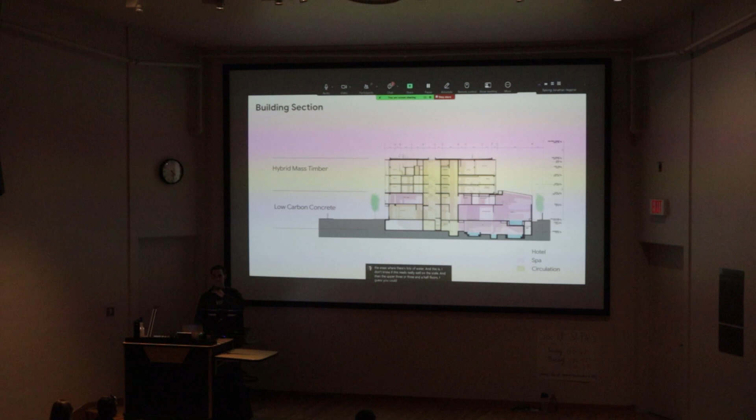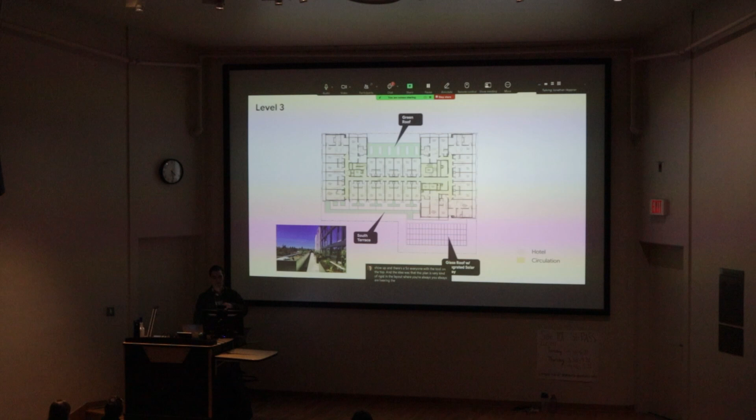And then the upper 3 or 3.5 floors, I guess you could say, are all just mass timber decks over light gauge construction. And I'll kind of flip through these, but you can get an idea of the pools that are in the bottom that are starting to show up, and there's a solarium with a pool on the top. And the idea was that this plan is very kind of rigid in the layout, where you always are bearing the mass ply panel on the party or the partition wall between the units.

So it's really, I want to call it a house of cards, but I feel like that's not the right thematic term for this. But the idea being that you just run mass ply panels across, and it gives you the same benefits that the point-supported system does at a smaller scale, which is that you get the taller floor-to-ceiling heights. And so this is probably about a year ago, they started tilting up the walls and dropping the panels. And much like all of the other buildings that we've done, the mass plywood actually, after you get it out to the job site, ends up being the most simplistic part of the job, which is great.

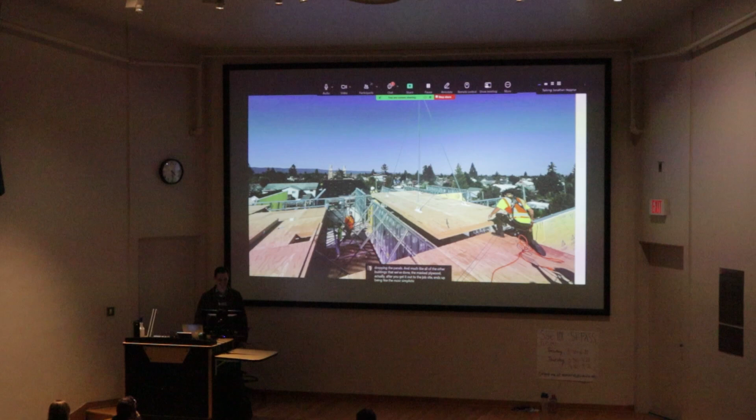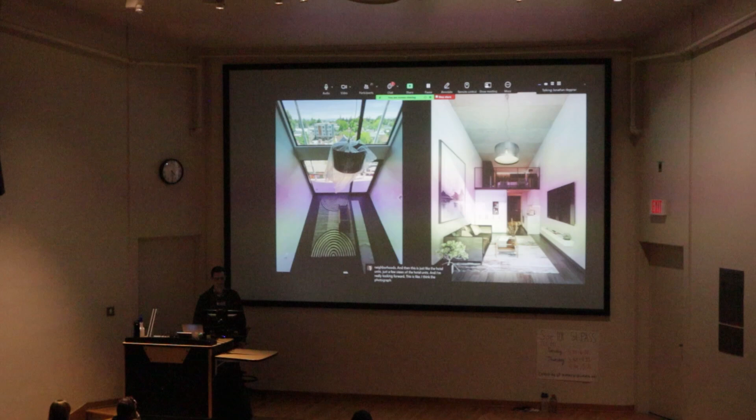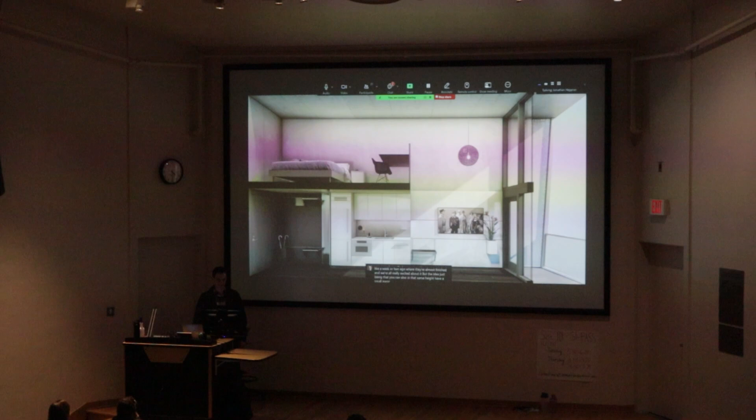The units have a great view of some of the adjacent neighborhoods. And then this is just a few views of the hotel units. And I'm really looking forward, I think the photograph of the lamp in it was taken a week or 2 ago, where they're almost finished and we're all really excited about it. But the idea just being that you can also, in that same height, have a small mezzanine level bed loft that you only need a 6-inch floor to support, which is really cool. And just thin up the actual use.

And then this is not mass timber, but it's just cool. It turned out kind of like the rendering, so we're like, oh my gosh. And then if you're in Portland in about 3 months and are really interested, the idea of the spa, it's really coming together. And I thought I would just throw this in there. It has nothing to do with timber, but you know, you can't use timber everywhere.

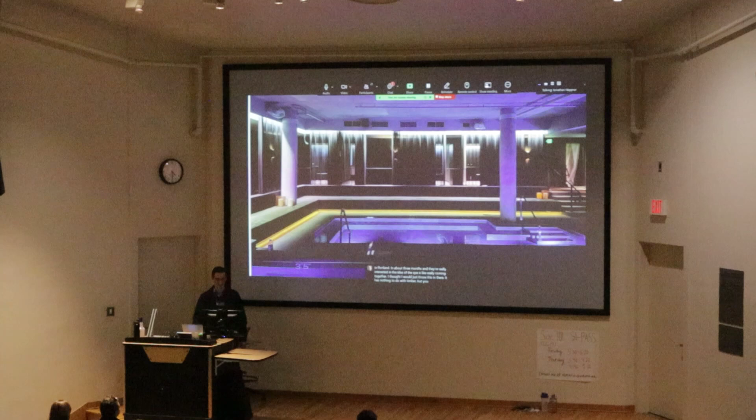So. All right, well, I'll stop there. It was really great sharing a little bit of work. I don't know that I've tied this in a neat and tidy bow, but I was mentioning those Sears Roebuck homes that were being shipped around the country in the early 1900s. And I don't know if this really reads well. It's kind of this funny clipping. But I loved that it was like, build your home the skyscraper way. I don't know what that even really means.

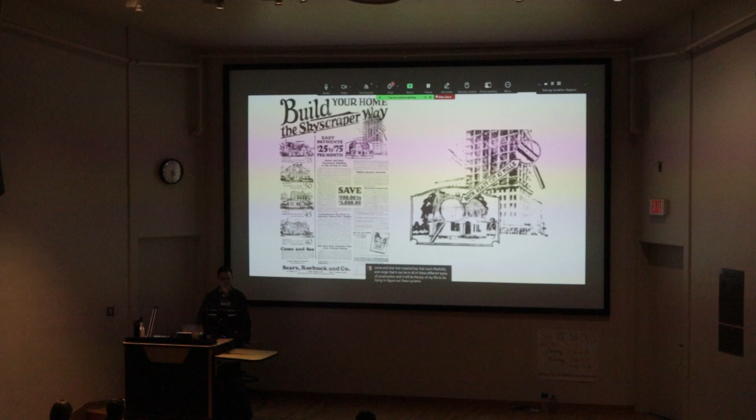But if you look closely at the zoomed in pieces, it basically is showing that the same pieces of wood being used to build the skyscraper are the same ones you can use to build your home with. And I think that this, in a weird way, still makes a lot of sense, and that material has that much flexibility and range that it can be in all of these different types of construction, and it will be the joy of my life to be trying to figure out these systems as long as I live, so I'm excited about that.

And if you were reading the news, turns out that Japan just launched the first wood satellite into space a couple days ago. So wood's going to the metaverse now. So anyway, it's nice talking with you this evening, and I think I'll stop there.

Okay, you mentioned that some of your buildings have helped contribute to code and how lumber has been accounted for in code in Portland and Oregon and elsewhere. I can imagine that was at one point the most difficult part of working with wood. What is currently, in your mind, the most difficult part about working with wood? Well, I would say that the building code process is an ever-evolving animal that will continue to be difficult to get people comfortable with mass timber, so it's not in any sense resolved per se.

And I know that lots of places are still trying to adopt the mass timber building code, and there's a lot of jurisdictions, like New York, that have started to be more interested in mass timber, and there's construction happening with that. But New York has obviously been one of the most concerned about the use of wood because of the density of people and the scale at which buildings happen there. So that does take a lot of work. So right now, the question is, what am I thinking about most with wood, or what's the most difficult part of working with wood?